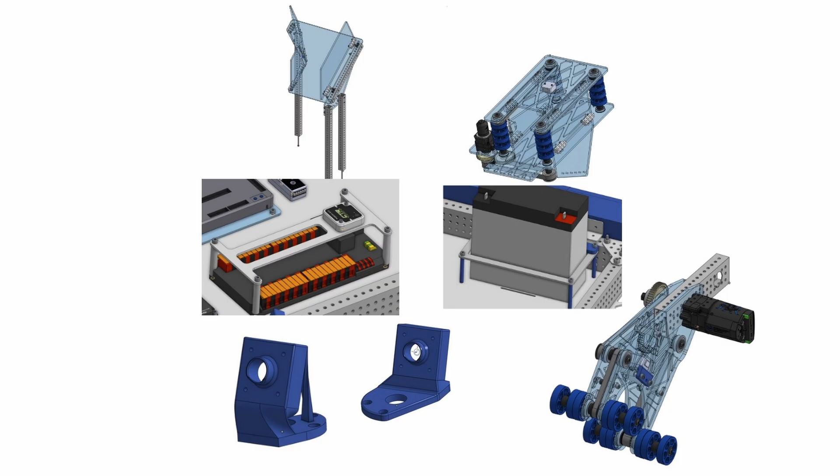My main job was to design the subsystems for the robot, working with other subteams to make sure their needs were reflected in our design. The master sketches soon turned into actual CAD models, and many late nights were spent working on the chassis and calling the electrical lead to decide the layout for those electronic components.

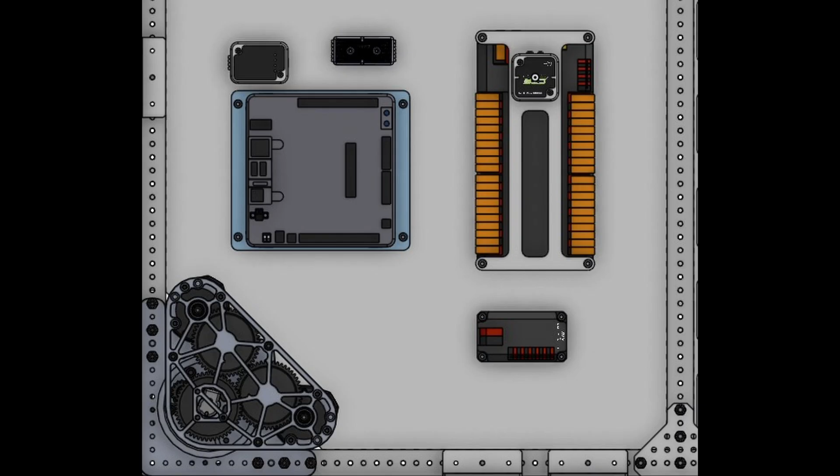I also designed our end effector and funnel system to intake and score coral. That's those white PVC pipes on the highest levels of the purple reef.

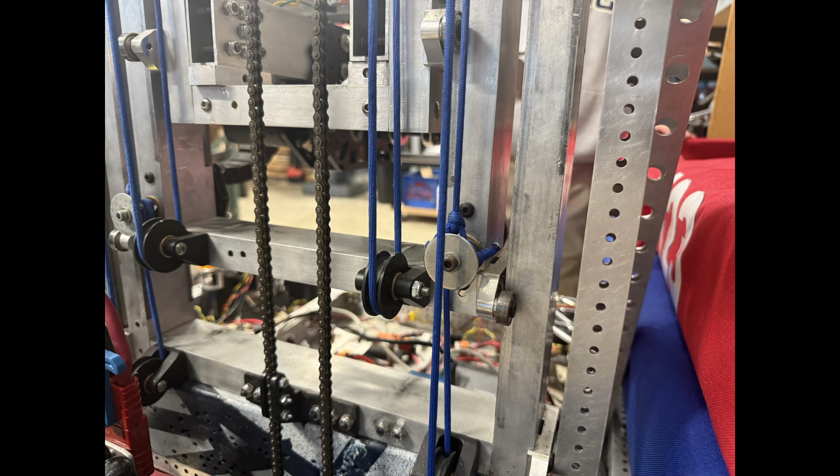To rig the cascade elevator that we chose for our robot, we needed a knot that was strong and didn't slip. I decided to use the bowline knot on the ends, which I learned from my camping trips.

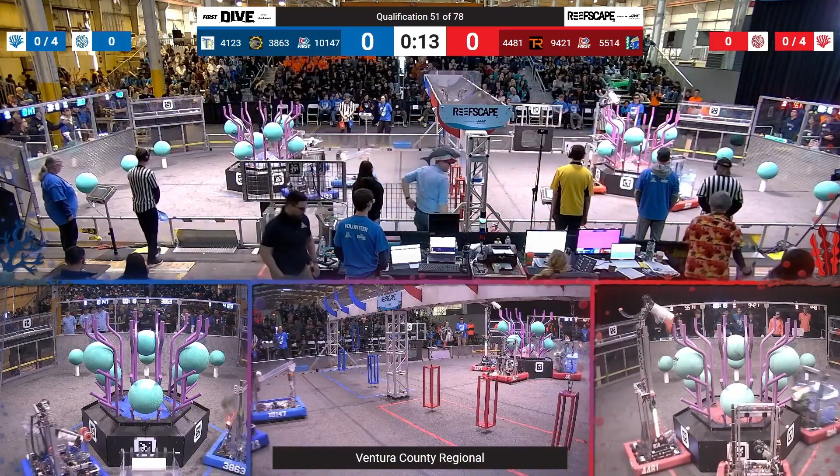After cooking up some strategies that we could use at competition, it was time to show the robot off at the Ventura County Regional. We got to play against some very inspirational teams, and we really wanted to look good.

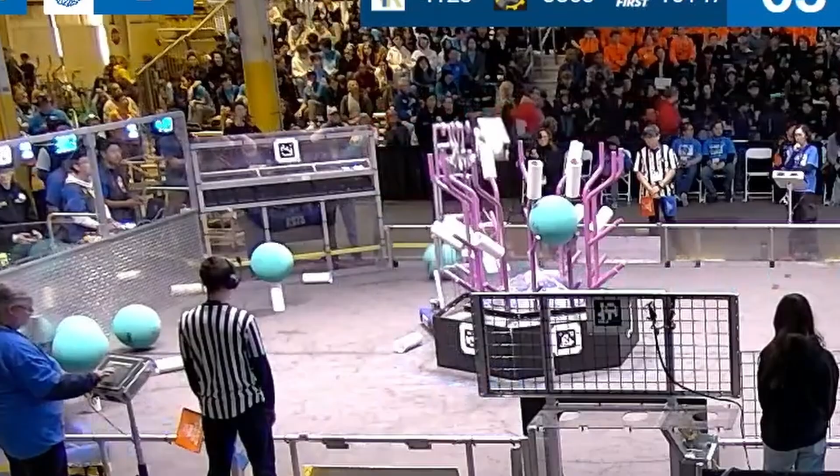The Ventura County Regional was a disaster. The vision failed to be even close to the poles of the reef, and our camera streams were eating bandwidth that we literally didn't have. We also had problems with game pieces getting stuck in our robot and incapacitating it for entire matches at a time.

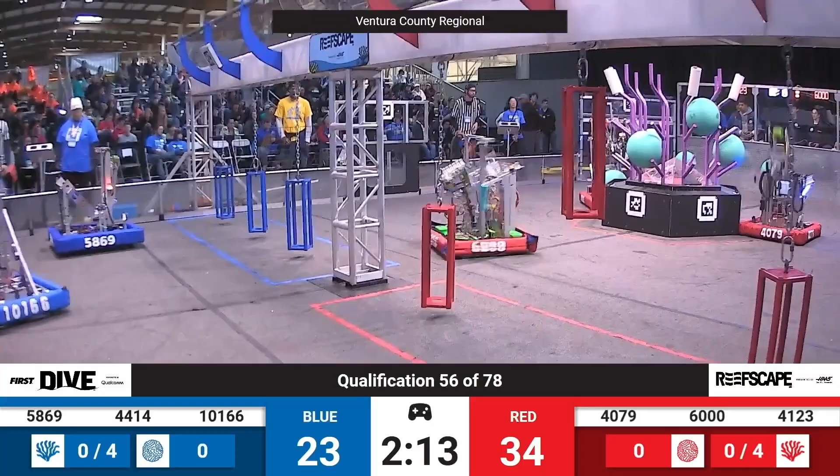On the bright side, we knew exactly what to do when we got back home.

The problem that was hindering our robot was that our chassis was shaped like a bowl. The swerve modules and the camera mounts formed a high wall, and the pieces fell in and got stuck.

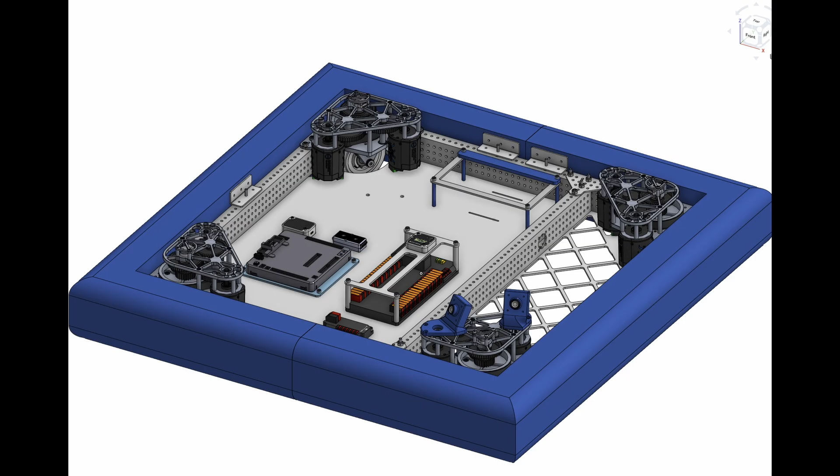I first swapped the swerve modules for older, shorter ones that we harvested from the prior year, and I designed entirely new camera mounts that could be put on the corner of the chassis.

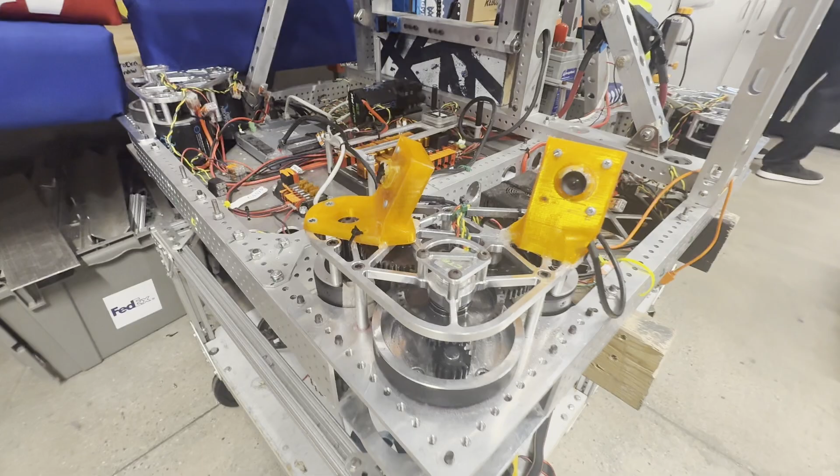For those camera mounts, I actually decided to print those in TPE, a flexible material, so that if anything were to hit those camera mounts, they would just bend and come right back instead of shattering.

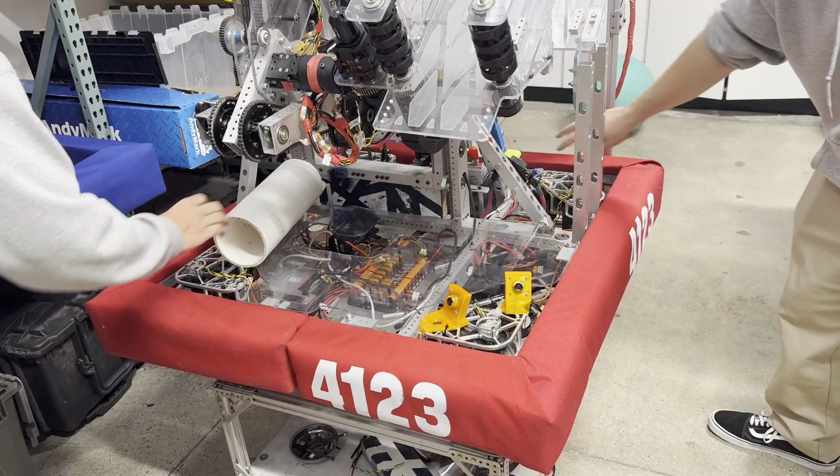We made a polycarbonate cover that flattened the chassis and allowed for pieces to slide right off. But to keep our weight low, we attached this plate to the bumpers, because the bumpers didn't actually count towards our weight total. This rapid iteration paid off at our second competition, the Aerospace Valley Regional.

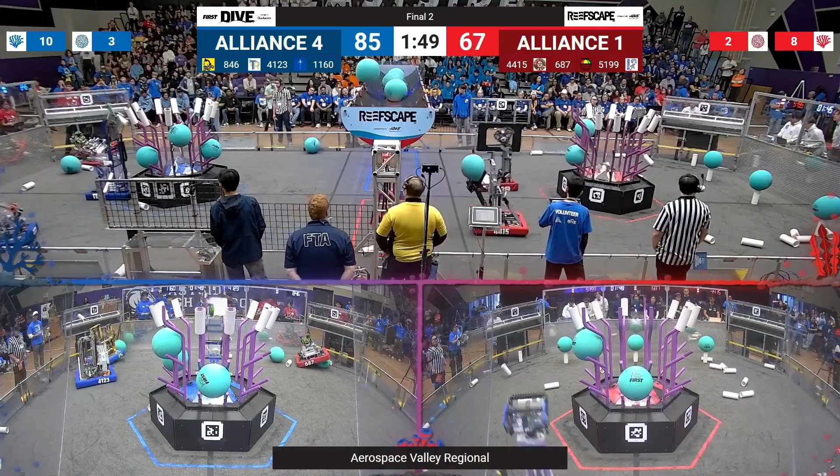We made it to the finals, achieving the best season in team history. I continued to devise match strategy and use scouting data to make alliance selection choices. And I also worked with those alliance members that we chose to make a deep playoff run.

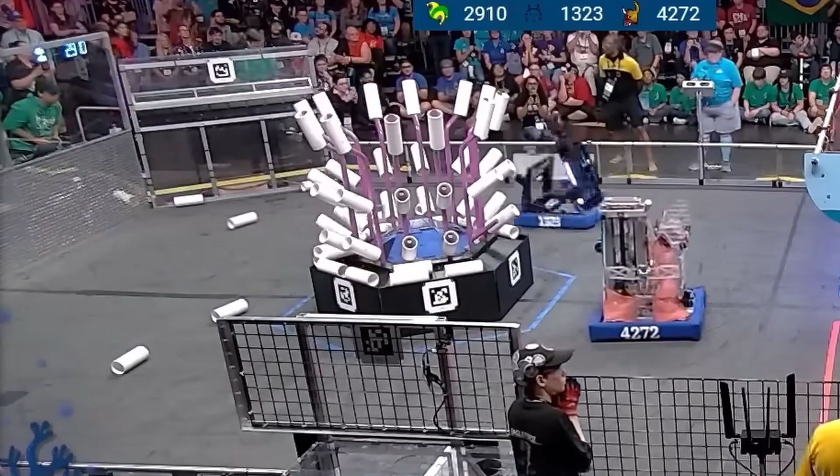Watching the World Championships, I saw that the meta shifted to ground pickup, as the scoring zones that our robot could access got filled up very quickly. Our intake just couldn't do it.

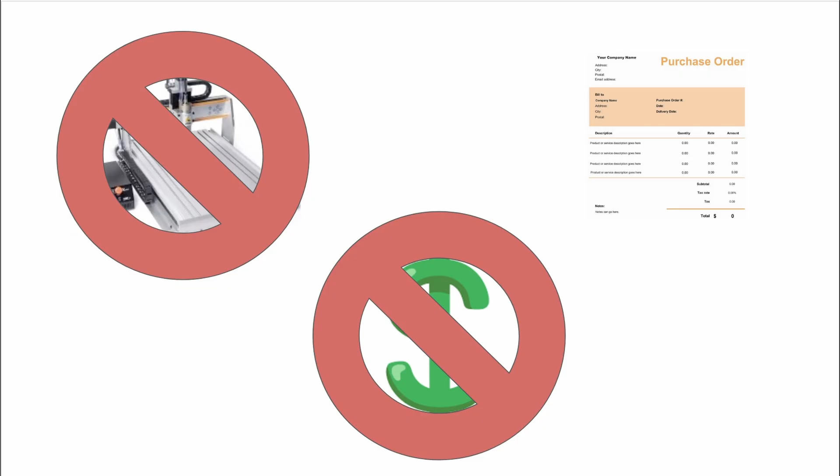But our team had no CNC access, limited budget, and no way to place a PO order, as our school's office was closed over the summer. The challenge: add a ground pickup without fully redesigning the intake.

My solution was to keep all the same parts, same motors, gears, and sensors. The only change I made was to swap two belts and adjust the geometry by making new plates. To get the geometry right without the precision of CNC, I 3D printed jigs that we screwed the polycarb to.

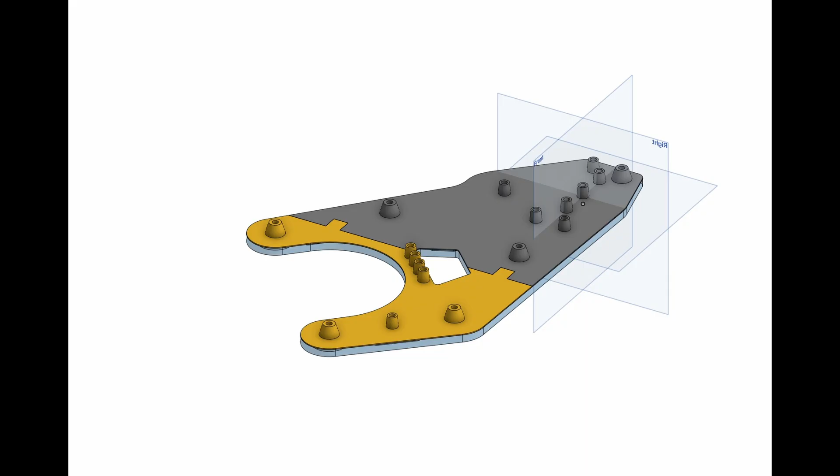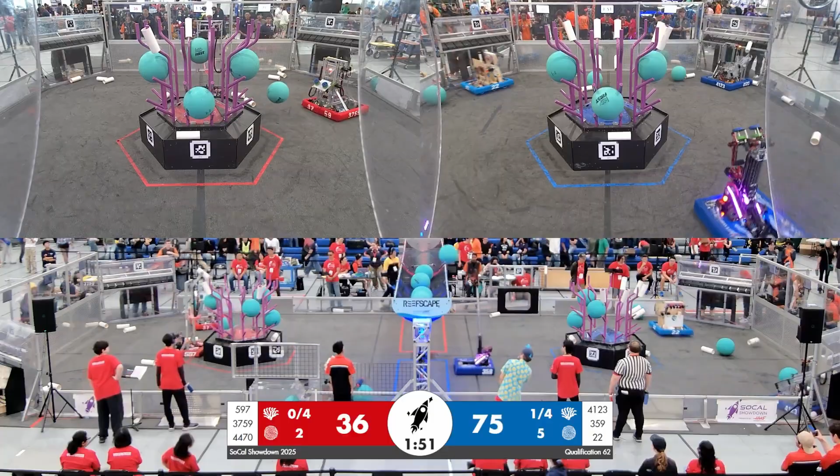After a day at the jigsaw and the disc sander, and only 2 trips to the Home Depot, the ground pickup was ready. At SoCal Showdown, my improvements were put to the test. The ground pickup was successfully squeezing the algae and picking up coral.

Then, mid-match, our elevator kind of decided to collapse.

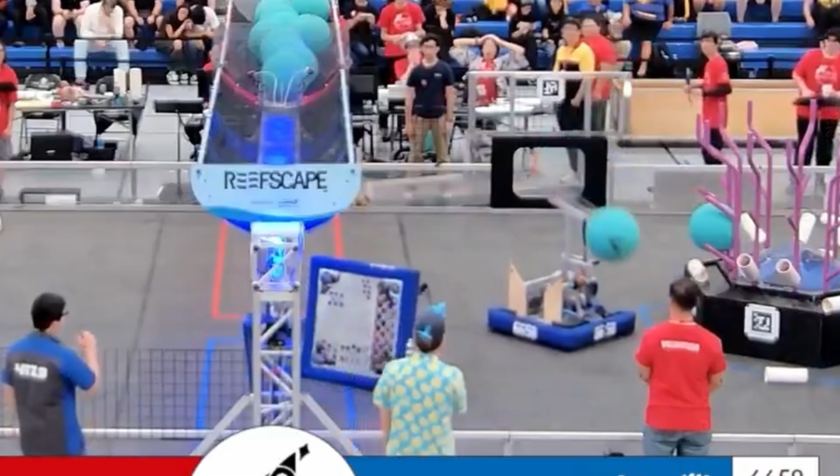My ground pickup became our only method of scoring points, and we were still able to contribute to our alliance in the playoffs because of it.

Now, as the new season approaches, I've been teaching CAD members, mostly freshmen, the basics, so that they can make an impact on the team come January.

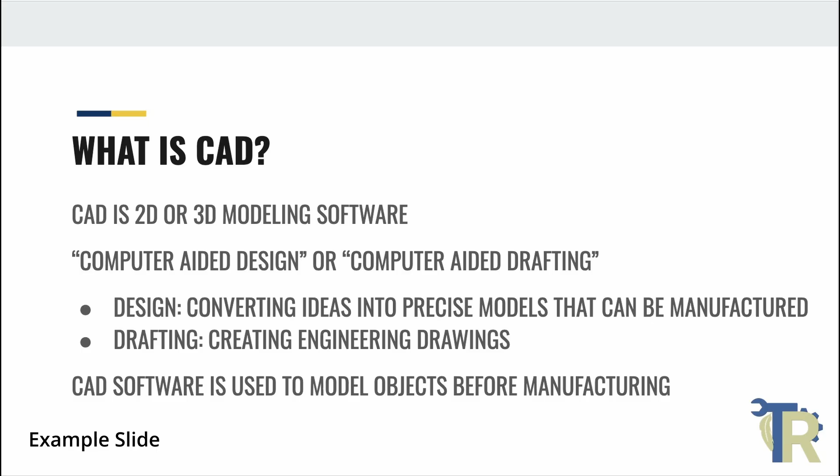I think they've grown a lot in the past 2 months, from having no experience at all to being able to build full mechanisms like 2-stage gearboxes from scratch.

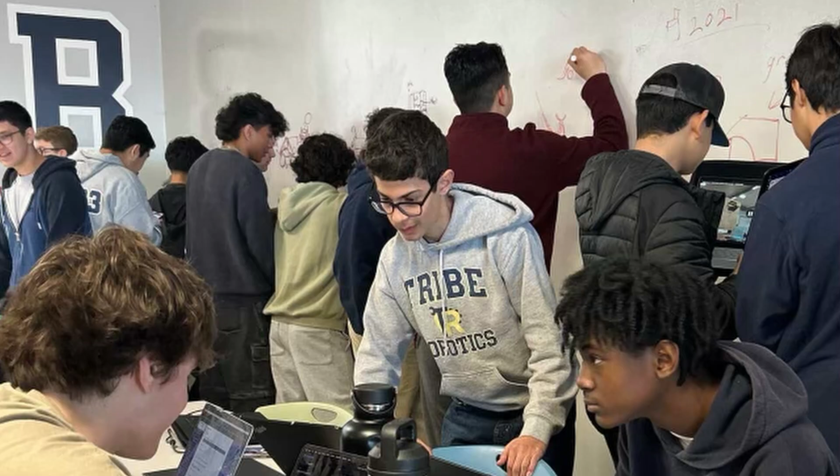As of the time of recording, the FRC season started last Saturday on the 10th, and so the cycle continues. I'm really excited to see what our team's about to cook up.